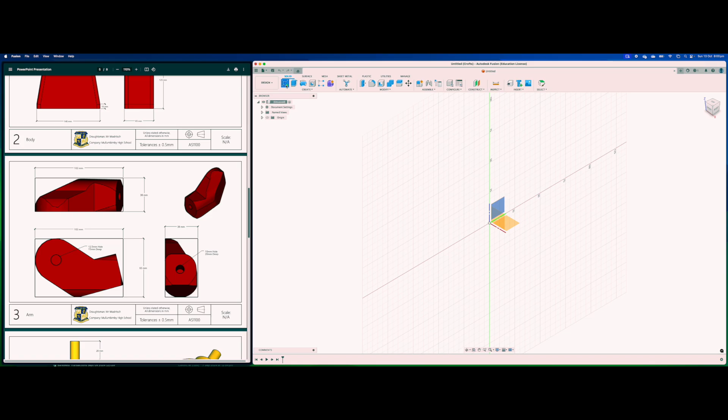I'm going to sketch on the side this time. What I'm going to do is draw this outside rectangle, so I'm going to go rectangle and use it as a construction line. That outside rectangle is 60 by 102. Then I'm going to turn my construction line off.

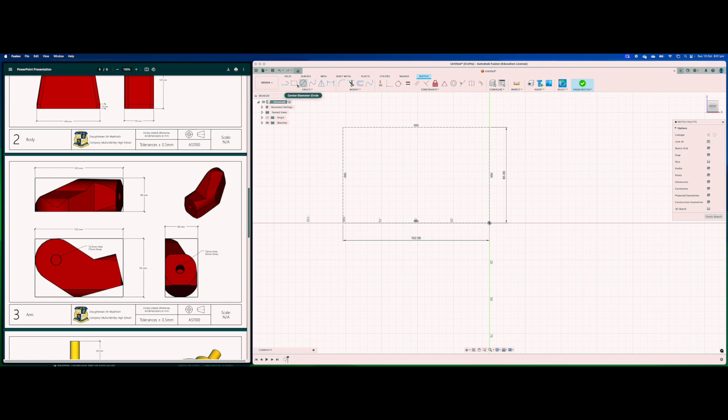So I'm back to normal lines. And so what we're going to do here is have a little bit of a play around, because we don't have many dimensions.

So we need to start with some sort of curve. I'm going to go arc, choosing somewhere up here to somewhere down here. Actually, I'm not going to do that, I'm going to change my mind.

I'm going to just start with the line tool, starting down here somewhere. I'm just going to kind of draw that shape, draw that down to here somewhere, draw him up here. We might draw it at 90 degrees across to here somewhere. Then we'll come down, then go from there to there, something like that. And then we just have to add in a bit of a circle up here.

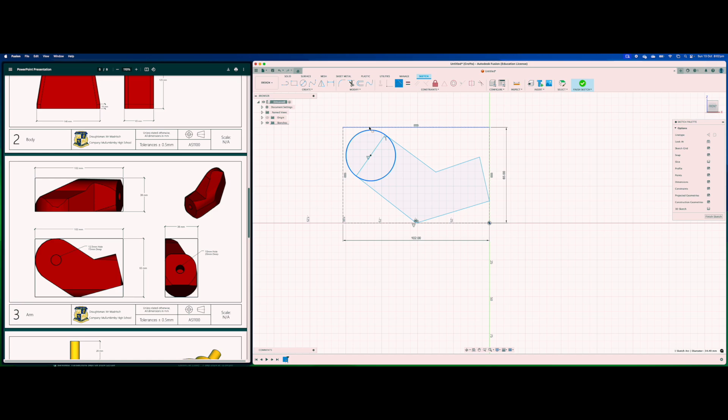So if we find the middle of that, and we do that, we're then going to come up here. We're going to say this circle needs a tangent to that line, and it needs a tangent to that line, and this needs a tangent there, and this needs a tangent there. And we kind of got our shape coming in now.

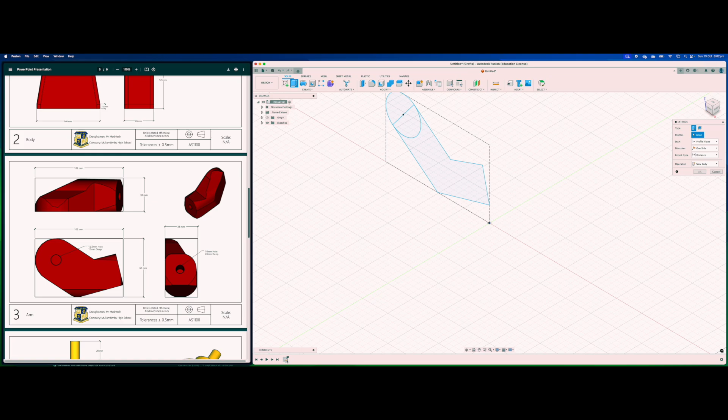Now, do we have many other dimensions we can work with? Not really, so let's go and work some things out. Let's say that this here - oops, I've just accidentally hit enter. So let's go back into our sketch. We're going to dimension it and say this and this need to be 90 degrees, as to this, and this needs to be 90.

I don't really care too much about some of these other ones, but we might dimension this one here and make it 130 so it's a little bit bigger. Maybe not, 120. It's probably a bit too sharp, so we might go 125 again.

Then we have this one down here, which looks roughly right. How long is this line currently? Let's make him - not that way. We're going to dimension from this corner to this corner, this way. We're going to make him 30. He looks a bit skinny though. 35 is probably a bit big, so we'll go back to 30. 32.5, that looks about right.

From here to here, make him the same. So he's now looking a bit narrow, so we might make him a bit bigger. We might make him 35, something like that. Maybe even bigger - yeah, that looks a little bit nicer. And we might do that, hey?

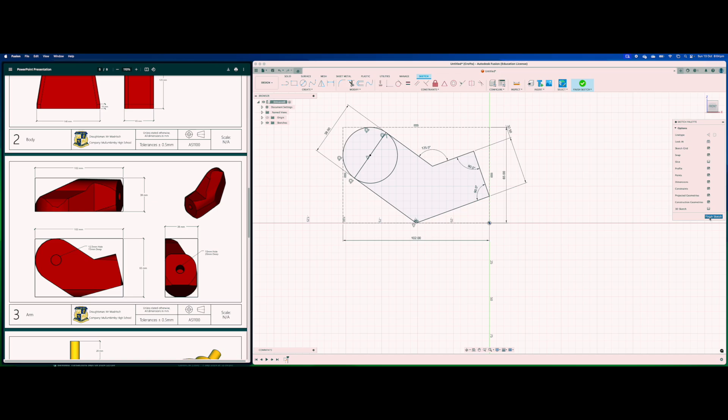So I'm going to finish that sketch now. So what I'm going to do now is just extrude this whole thing. And we're going to extrude him - I'm just going to say it's 38. I know it's not quite 38, but we're going to call him 38.

So now I kind of have this rectangle looking thing, which means that in here, that looks pretty good actually. So I'm just going to jump back into my sketch and try and draw a circle.

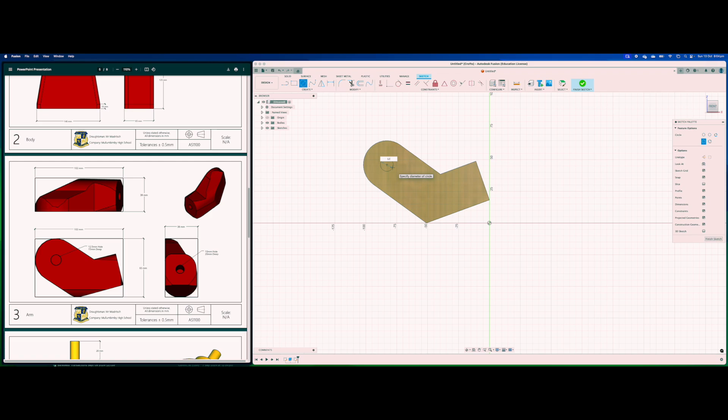There's the middle of my other circle, and it's a 12.5 millimeter hole. We're going to extrude him minus 15. Alright, so there's our hole on our arm.

Now we can kind of have a fiddle here, so we can put our other hole in here. That looks like the middle to me. So we're going to go 10.

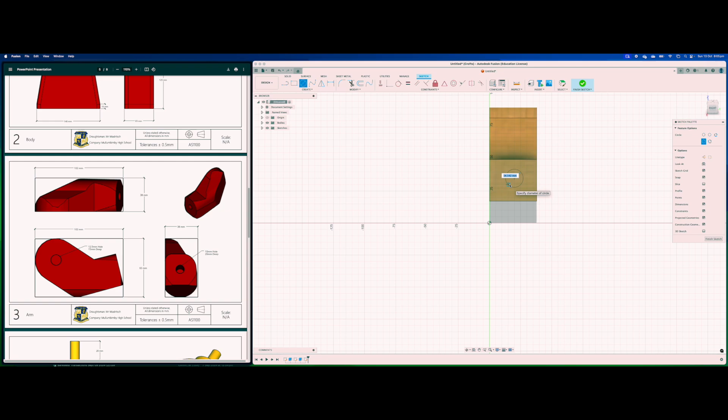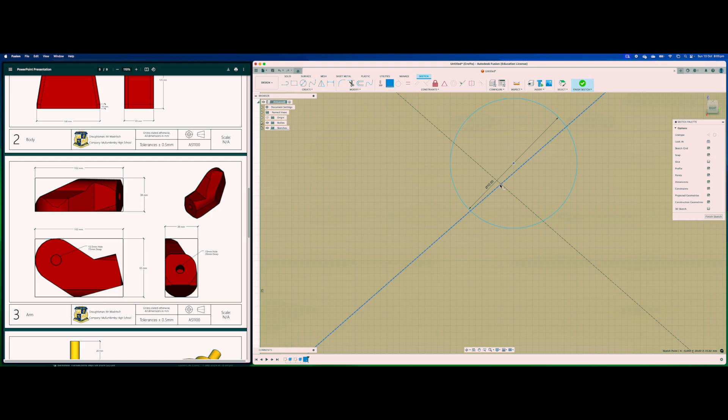It's not quite in the middle, so let's just dimension. In fact, let's not dimension, let's use another sneaky trick. Construction line corner to corner, construction line corner to corner. And then we're just going to coincident this circle to that point, which let's coincident him to here and there. And then he has to be in the middle.

Now we have our circle. We're going to extrude that guy minus 20. There's our hole for our hand there too.

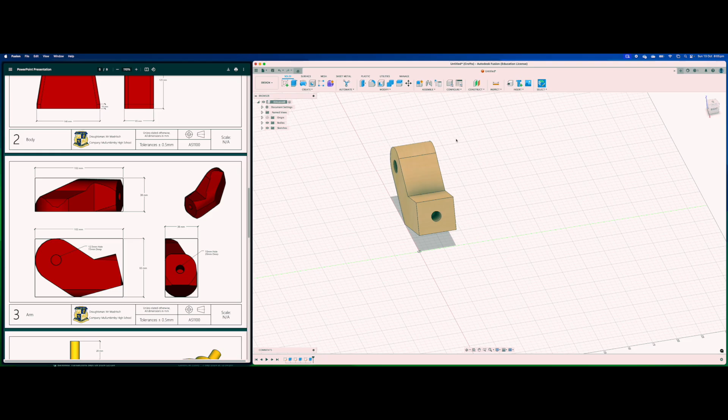So now what we need to do is we need to start doing some curving and things. So what we're going to do is we look at this. If I look here, this side stays flat. So I've got that side flat. I'm going to kind of run a bit of a fillet along here.

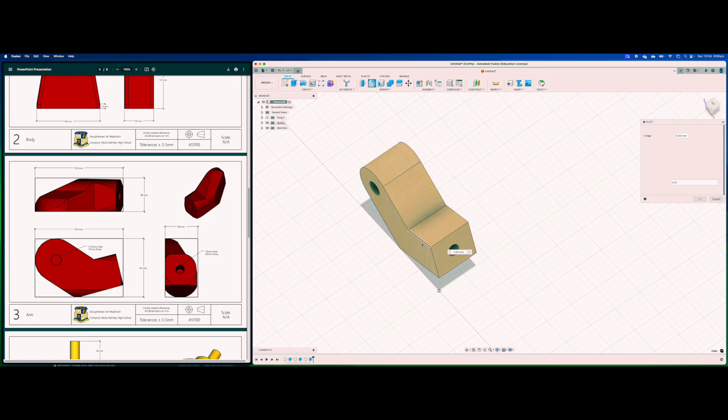I might actually fillet those two the same. In fact, let's go and give everything a bit of a round over. 5, I might go, actually, on second thoughts, let's get out of that. And let's fillet these two at, say, 10. Something like so.

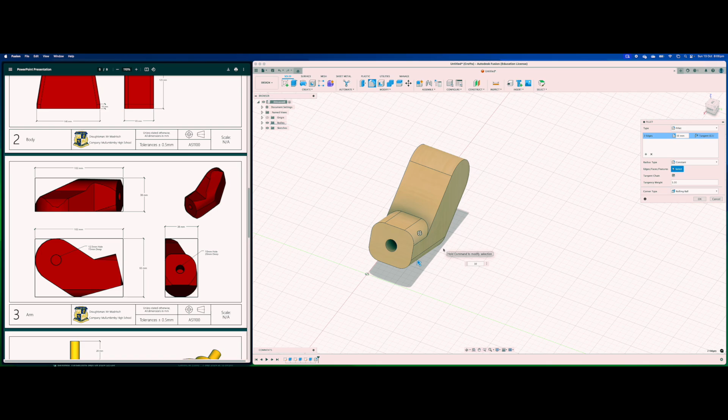And then over on this side, we're going to do a similar thing. We might go a little bit bigger. Let's keep it at 10 as well. And this one here we might also fillet.

Not sure what's about to happen though, because I only want that one edge. See here where it says tangent chain, if I undo that, it keeps selecting all the following edges. So I don't want a tangent chain. So fillet, tangent chain off.

I'm going to deselect a few of these. So I only want that first one for now. I'm going to try a few different things. So 15.

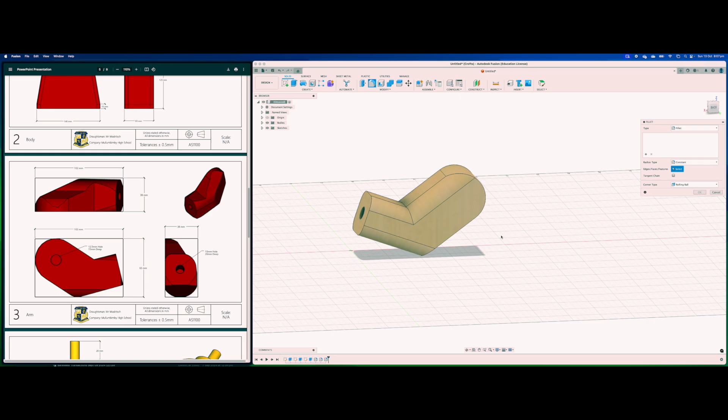Something like that. I could probably then also fillet this one and this one at 12 as well. I reckon something like that will get us out of trouble. That looks pretty good for now. It's not quite what we have going in our model, but that looks pretty good.

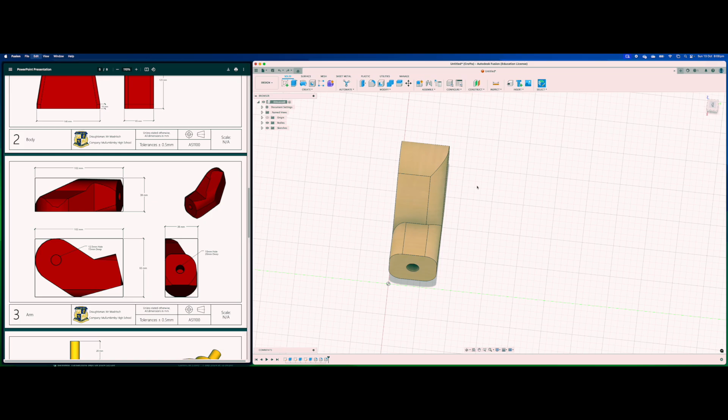The other way we can do it is we could undo, say, these ones, and we could go off, say, this face here. And we'll try and cut out a section. So if I want to draw a line sort of across here, something like that, we could then extrude that out.

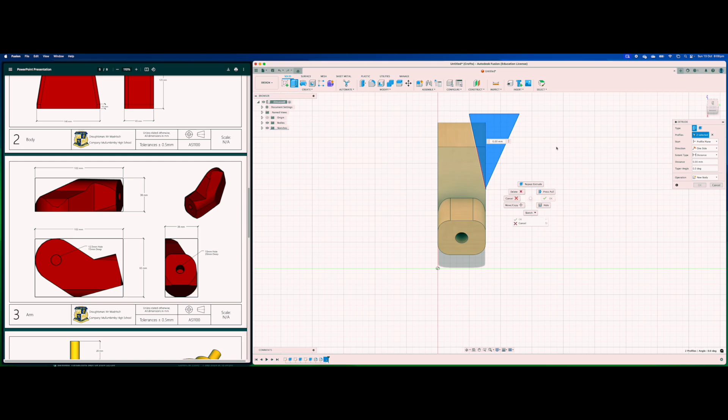I don't think it's going to quite get us what we want, as in if I extrude that down, kind of gives you a bit of an angle, which is not too bad. Maybe we'll go with that.

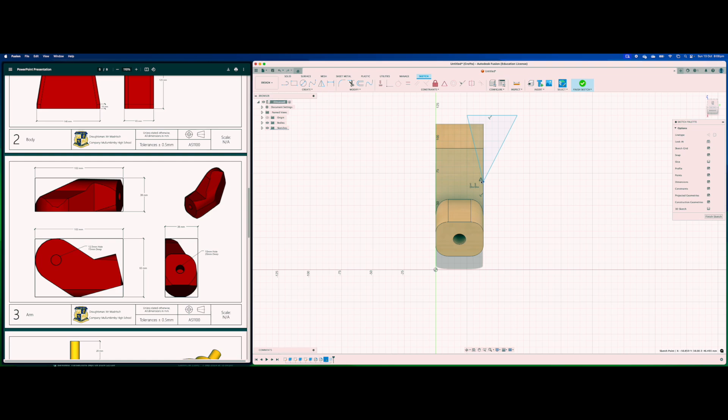I can just come in and fiddle with this a little bit. It's not quite right still. Maybe I just need to bring him down a bit. So he's stuck on that center mark. So if I just bring him down a bit, that looks a bit better.

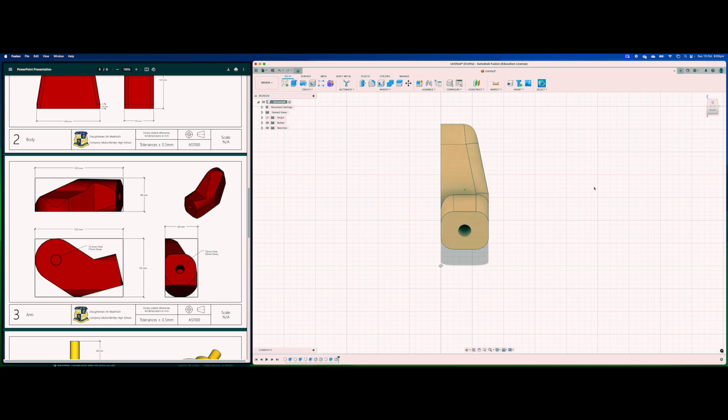And then I can probably just fillet that line around there. Maybe at 12. 10, let's go with 10. We'll call him done there. You got a little bit of angle on him. Round here isn't quite right, like I'd like it a bit more rounded, but that's okay for now.

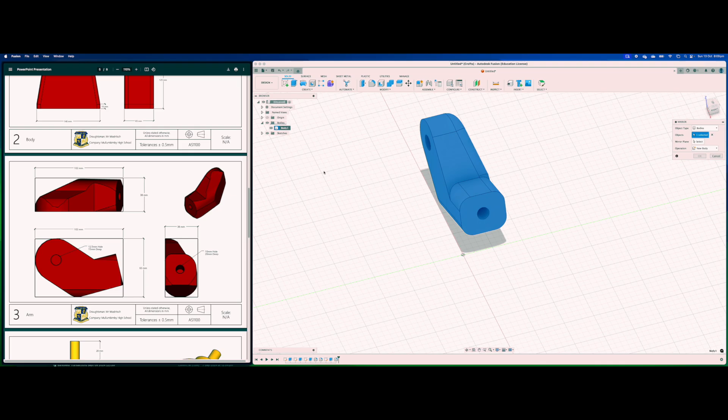So let's say that that's our arm there. So once we have that, I can then go and try and copy and mirror that whole thing. So if we then go mirror, it's going to ask us what we're going to mirror it around. We're going to say this one here, and we're going to say new body. And that will give us 2 bodies.

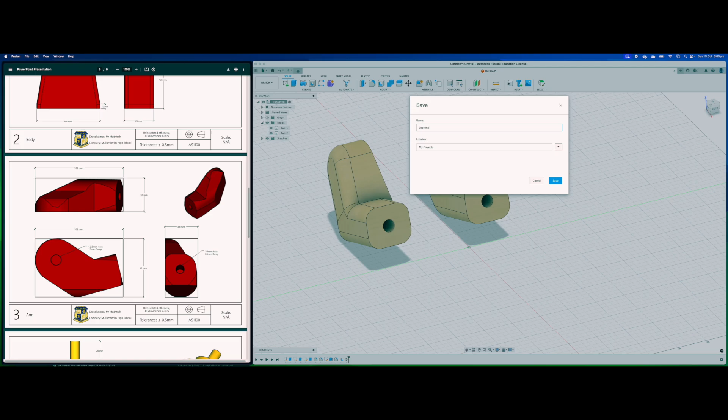If I then want to go and move my body, I can split them up a little bit so they're a little bit further away. So there are my arms. So hit save, Lego Man arms, and we're all done.